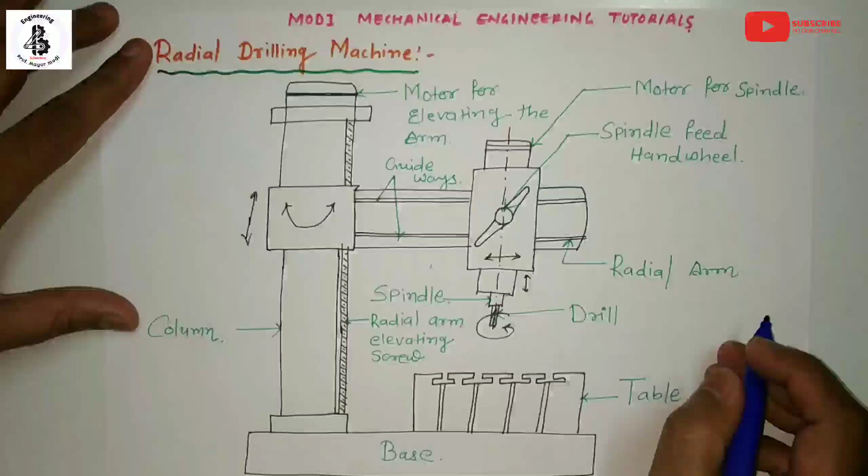Today I am going to explain about the construction and working of radial drilling machines. So basically a radial drilling machine is a heavy duty kind of machine, used for medium and large size heavy duty workpieces for making holes into the materials.

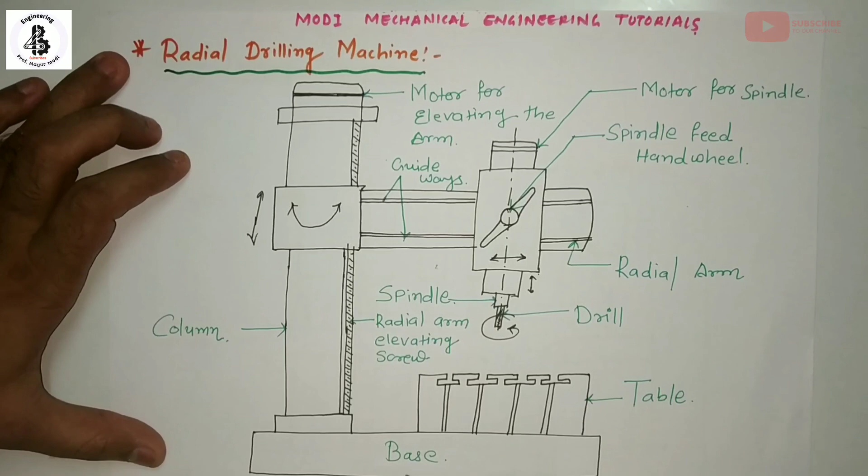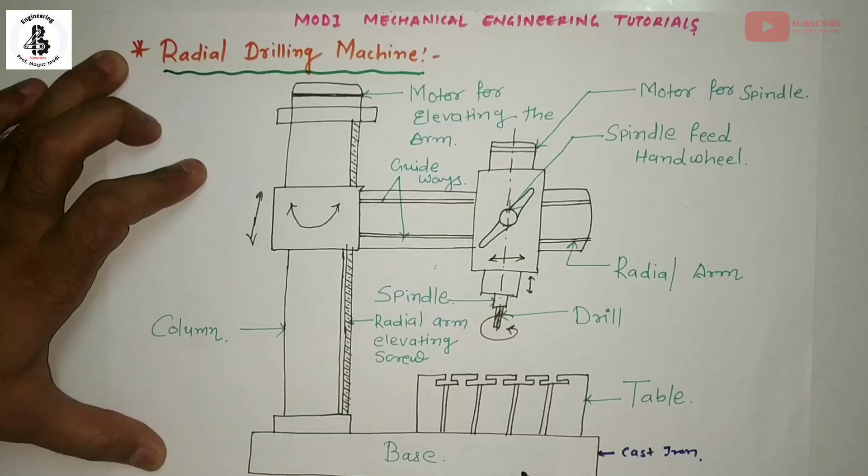Let us start with the construction. The first one is the base. The base of the machine is heavy in size and made with cast iron material, and all the assembly of this heavy duty machine is situated onto the base. Some kind of cutting fluid is also stored in the base section, and whenever required during cutting operations, it is transferred towards the tip of the tool to the surface of the workpiece.

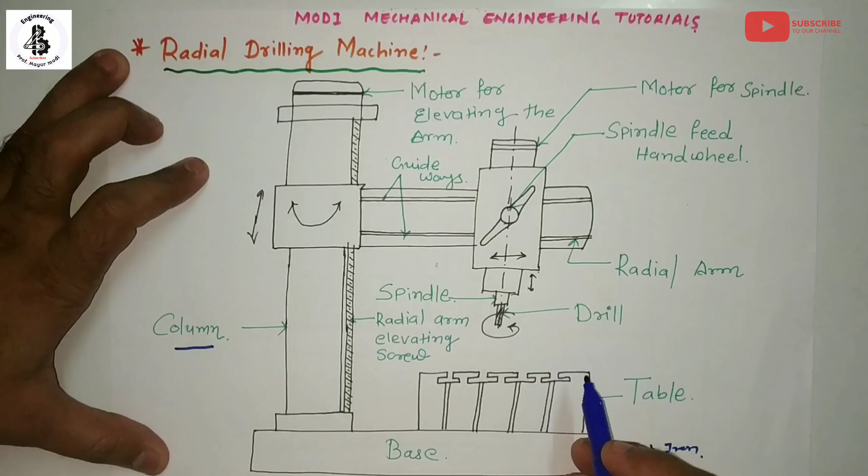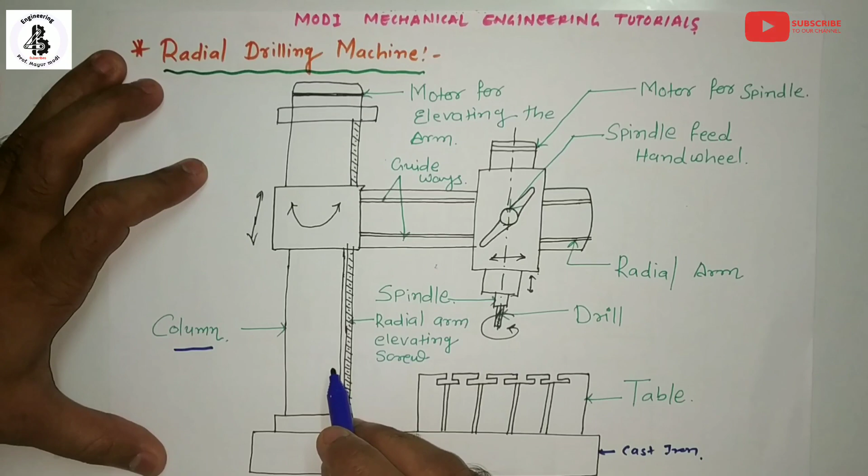The second important part of the radial drilling machine is the column. In radial drilling machines, there is a vertical column on one side of the base, and on that vertical column all the transmitting as well as controlling mechanisms are mounted.

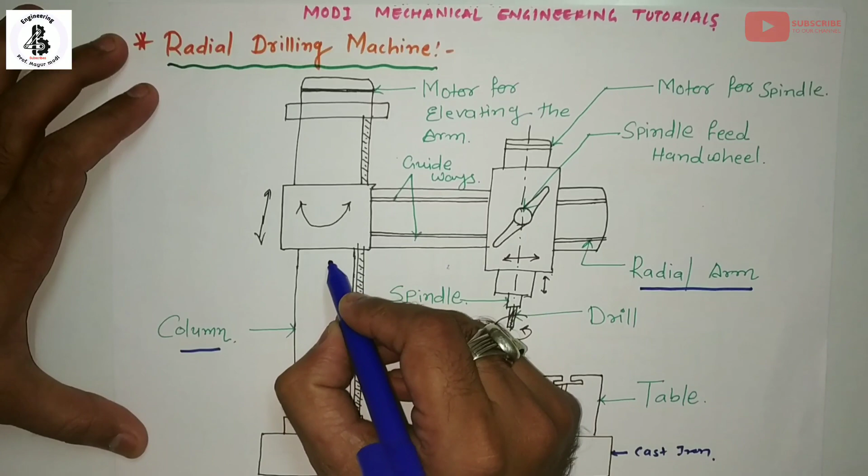After the column comes the important part called the radial arm. The radial arm is attached with the vertical column, and it rotates throughout the column. According to the height of the workpiece material, this radial arm height is adjusted.

Here is the table. The table is generally used to hold the workpiece material with the application of a C clamp, T clamp, or any kind of vise for holding the workpiece.

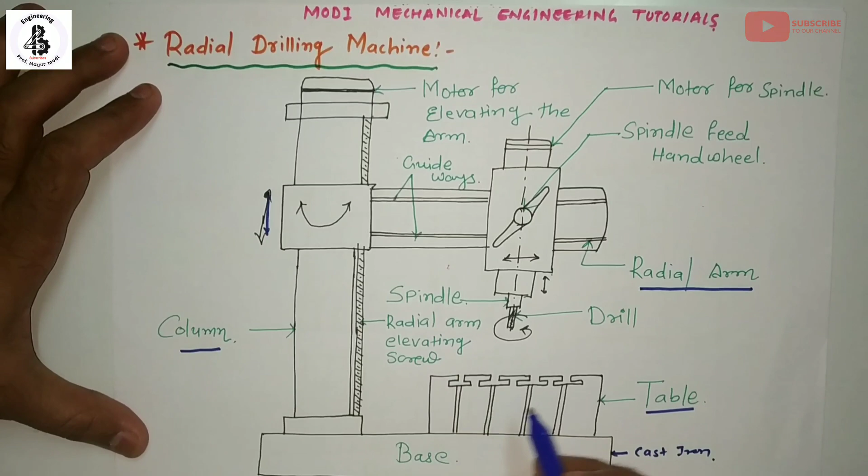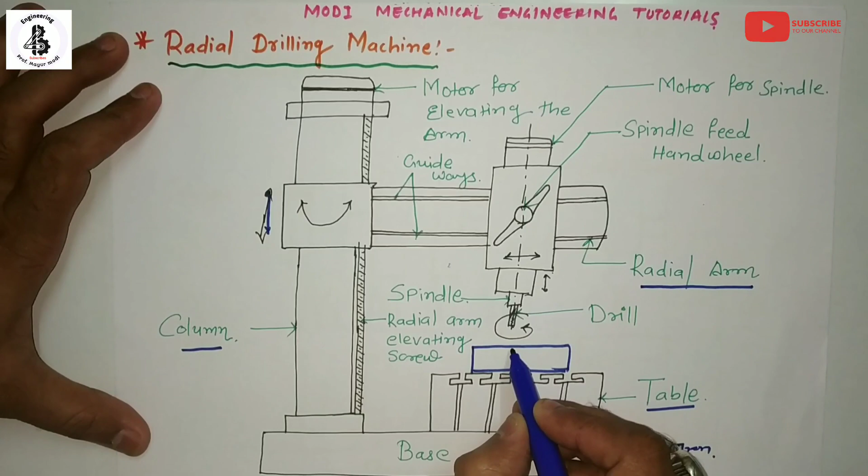If the workpiece is heavy in size, you can place it onto the base of the machine. Suppose this is our workpiece material, so it is fixed with the help of any kind of clamp mechanism. According to requirement, positioning of the surface of the workpiece with respect to the cutting tool or drill bit, the height is adjusted by the column.

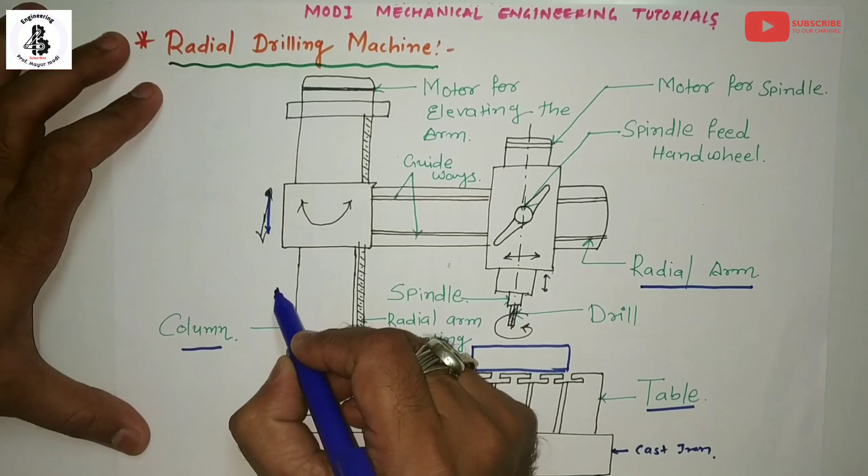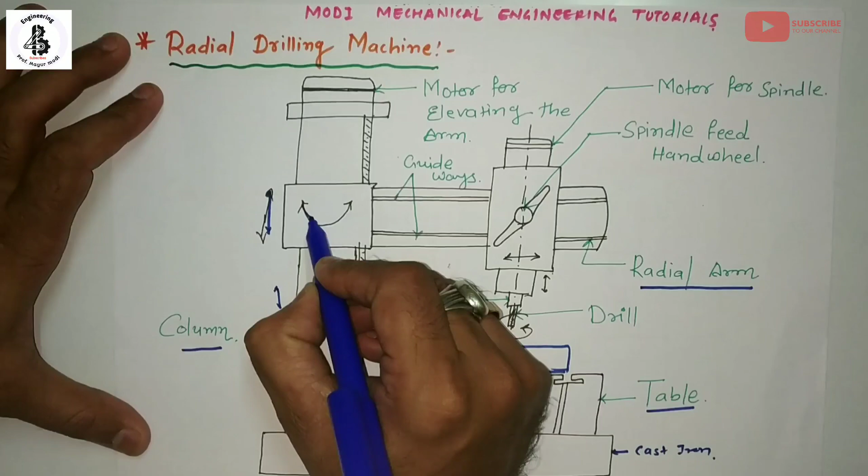The adjustment of the radial arm with respect to height - this radial arm is attached with the column, and it can rotate a full 360 degrees. So you can easily make contact of the drill bit with the workpiece at any position.

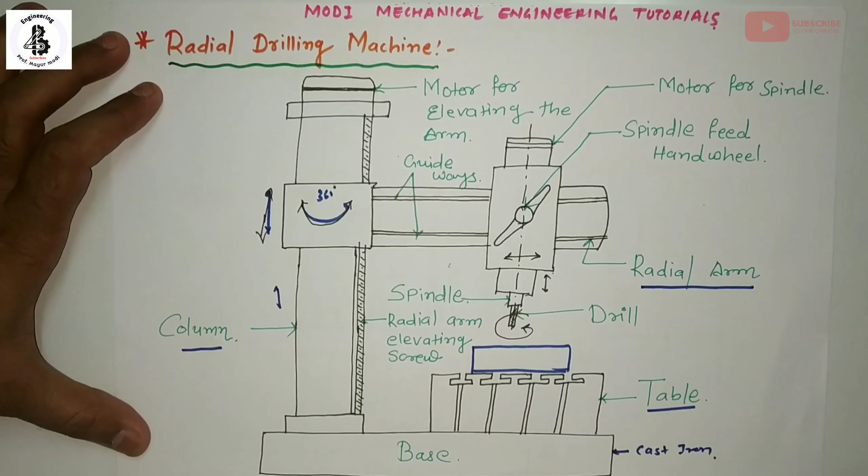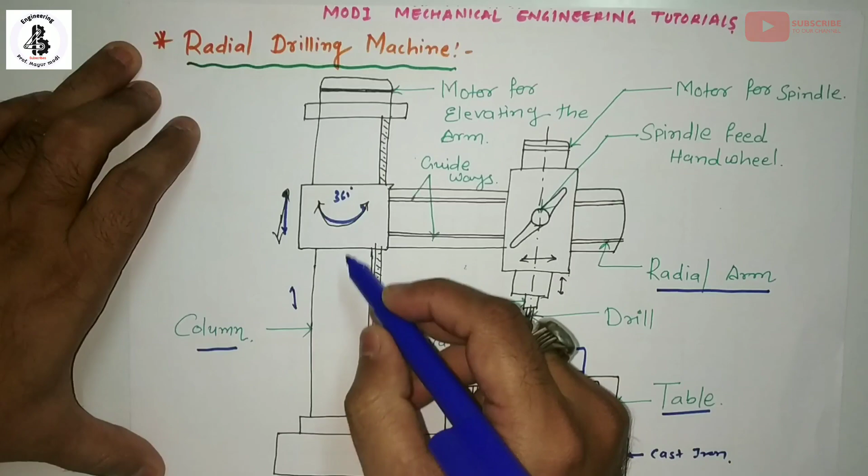At the top of the column, there is a motor for elevating the arm, so all the positioning of the up and down movement of the radial arm onto the column is done by automation, or automatic feed. It is provided for easily adjusting the height of that particular column.

Here is the motor for the spindle. The spindle motor is available in that assembly, connected with the motor of the spindle, as well as the spindle feed, hand wheels, sleeves and spindles. This individual spindle motor is available nearer to the radial arm.

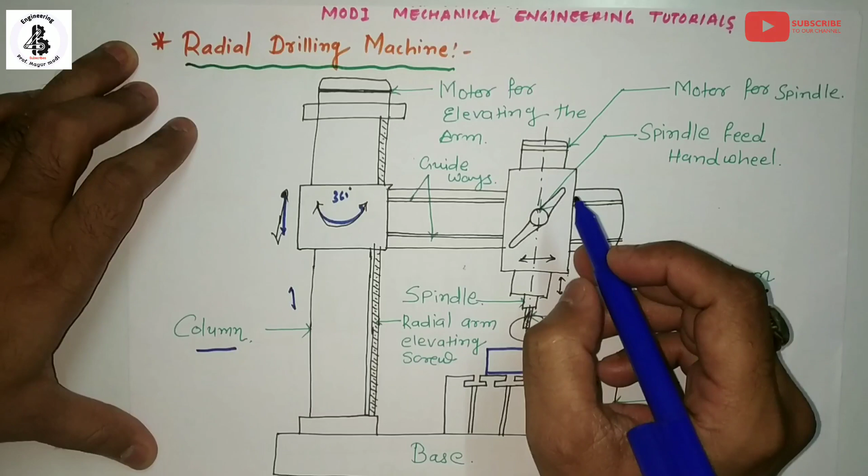So you can easily control the speed at that particular spindle of the drill bit. According to the positioning of the radial arm, the radial arm reciprocates on that particular guide ways - left to right, right to left, and 360 degrees rotation, and up and down.

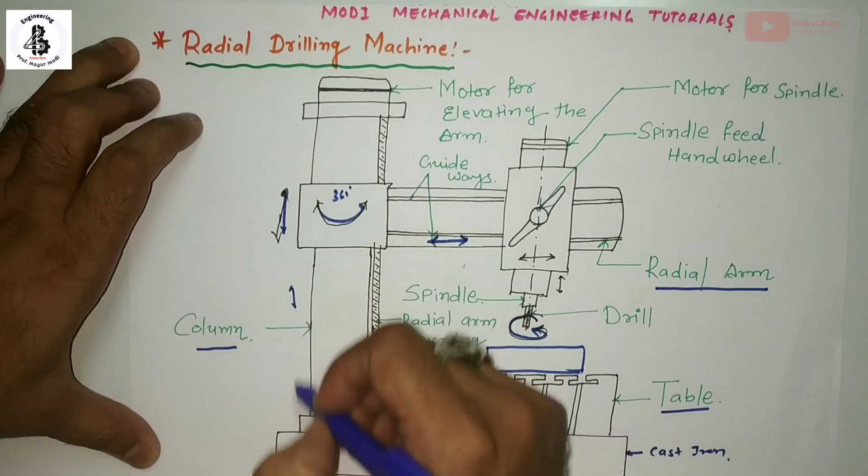With the application of the radial drilling machine, the positioning of the drill bit with respect to the workpiece is the easiest task as compared to any other machines. So that is the radial drilling machine.

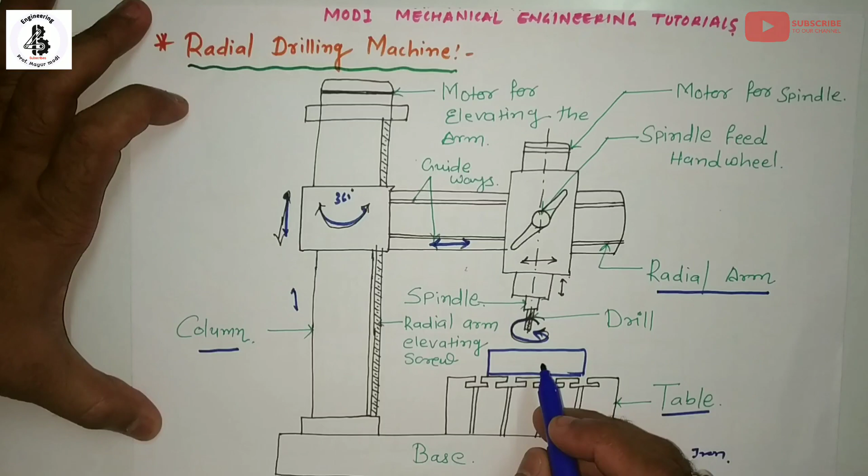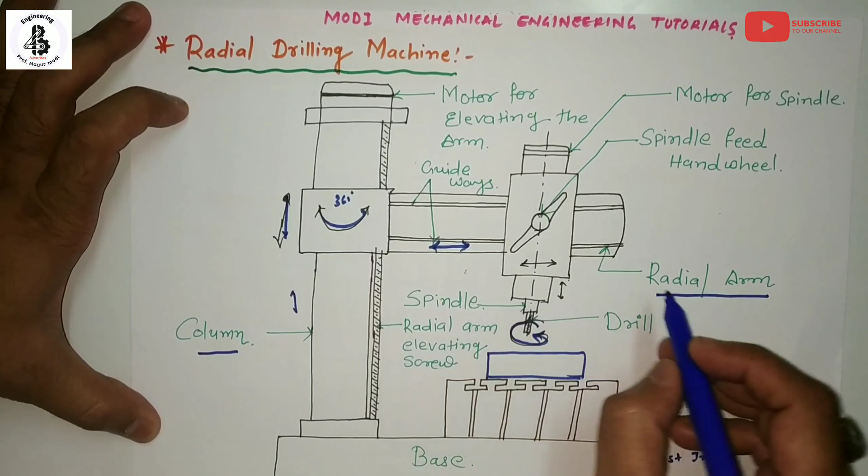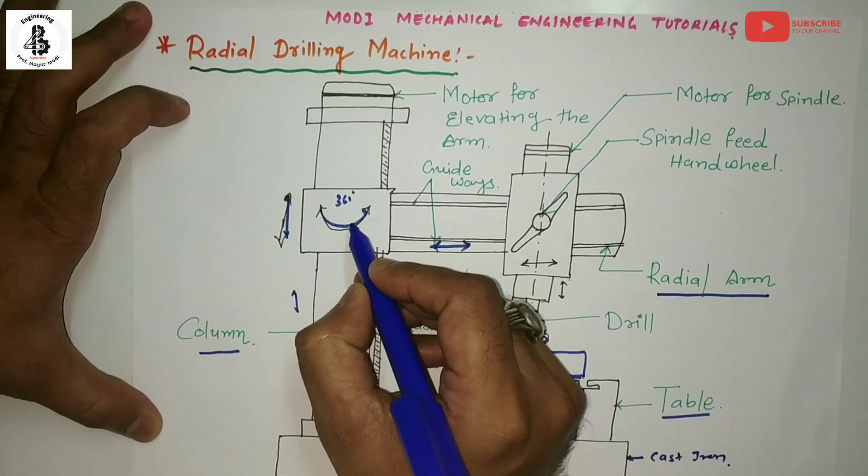In simple way, for the radial drilling machine, it is used for heavy and large workpieces. The machine consists of a heavy round and vertical column mounted onto a large base. The column supports a radial arm that is raised and lowered onto the column, and this arm may swing around the column for easily positioning the drill bit to the workpiece material.

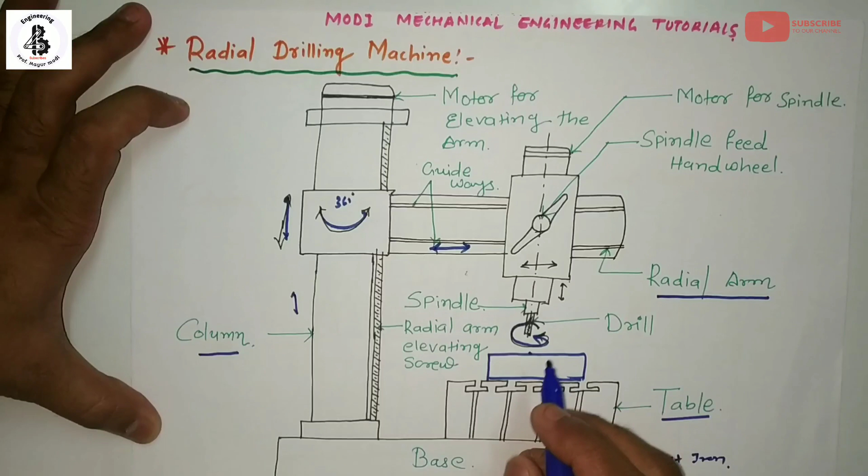In these machines, basically 3 movements combine together to permit the drill to locate any required position. The 3 movements are: up and down, swivel, and the radial arm reciprocating.